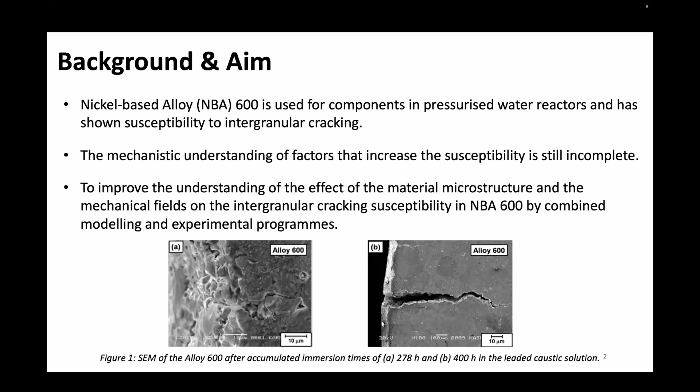So the aim of our project is to improve the understanding of the effect of the material microstructure and the mechanical field on the intergranular cracking susceptibility of nickel-based alloy 600 by combining modeling and experimental programming. So here, we want to represent the real behavior of alloy 600. Before walking into the simulation, we need some realistic finite element structures. One way of obtaining such detailed microstructure information is by using 3D EBSD.

With the realistic model, we then proceed to the simulation part, where we want to model the deformation. For that, we use the crystal plasticity finite element method to simulate the material deformation at a single crystal level. And then we expand this to look at the grain boundary excess energy, which is very important in the simulation of intergranular cracking. And for this, we use the cohesive modeling method.

We first start based on the surface energy of nickel alloys. Then we adjust the cohesive property, basically the grain boundary energy, based on the grain boundary misorientation. And our novel contribution to this field is that we account for the triple junction energy, which hasn't been thoroughly studied before, to further refine the grain boundary energy calculation. With this method, we're trying to address the challenge of varying grain boundary excess energy based on the misorientation and the triple line, to improve the accuracy of the simulation of intergranular cracking.

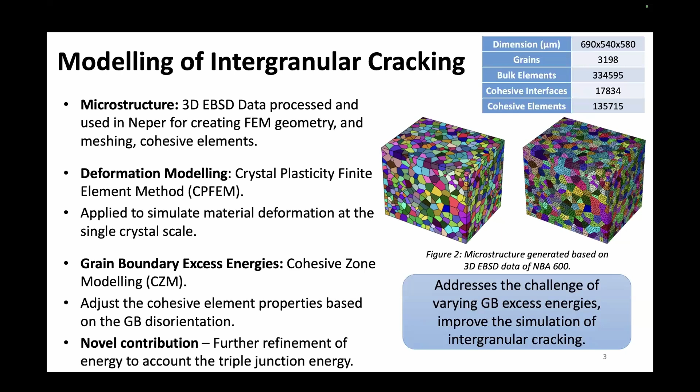And our second method is to assign different cohesive energy based on the misorientation of the grain boundary, based on the existing literature. With this method, we can account for the effect of misorientation of the grain boundaries.

And then our novel approach is integrating the effect of triple line junction into the GD model further to account for the effect of triple junction disclinations. With all the 3 models, we are trying, as mentioned, to account for the grain boundary excess energy more accurately to better simulate the intergranular cracking.

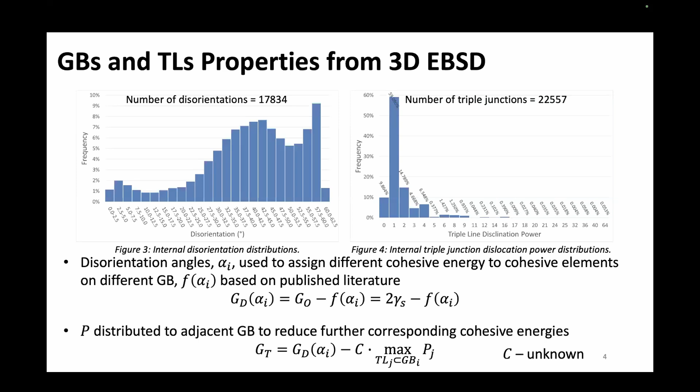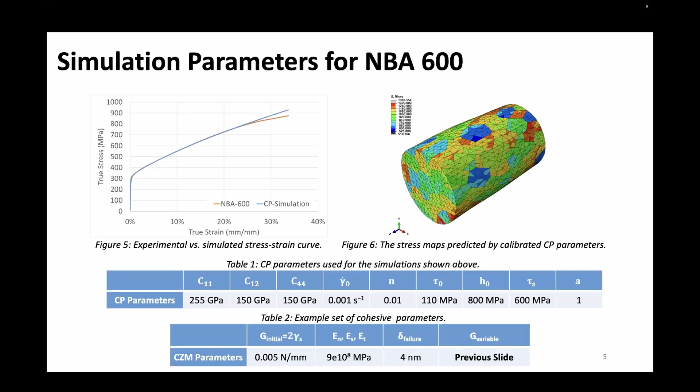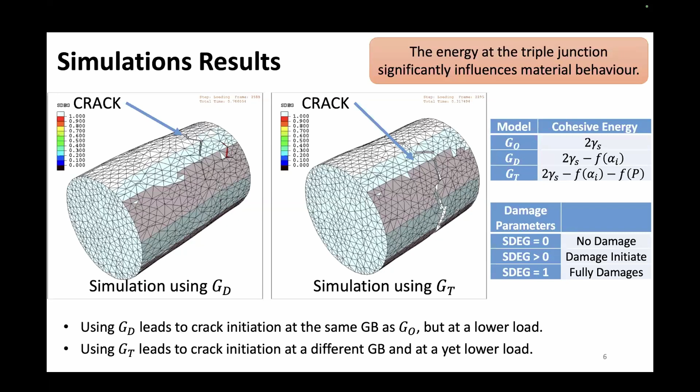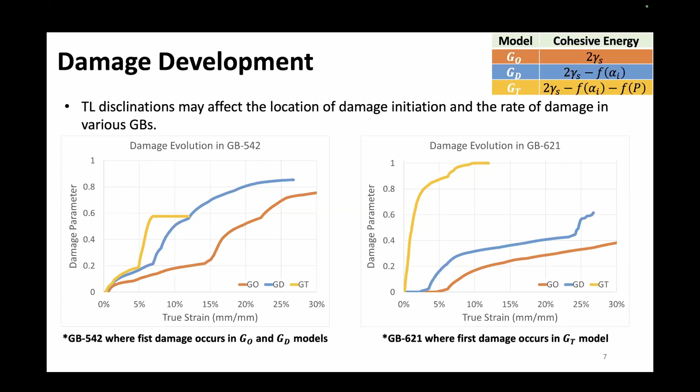And we can see that the GT has the quickest failure rate compared to the other two models, which reaches 80% of damaged elements at around 12% strain. The other two are slower, and the GO, which did not include any disorientation or triple junction, has been the slowest.

And when we turn our attention to this one, this is the percentage of the crack elements in the overall assembly. We can see the GT starts around 8% of the true strain and quickly fails at around 12% strain. For the GD model, which considers the disorientation, it didn't start until 24% of the strain, and it also failed quite quickly, but not as quickly as the GT. And the GO model, which is a baseline model, didn't fail until very high strain.

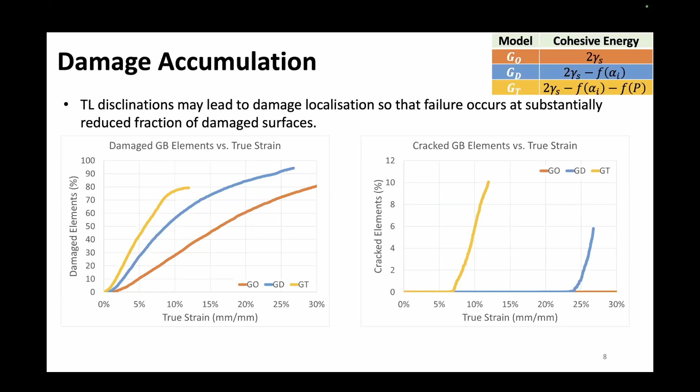So the takeaway from here is that the triple line disclination may lead to damage localization. So the failure occurs at a high rate and with a substantially reduced fraction of damaged surface. So that's our discovery from the simulations, and from those plots and the videos, we can see that whether we include disorientation or triple line junction disclination power has an effect on how we simulate the intergranular cracking.

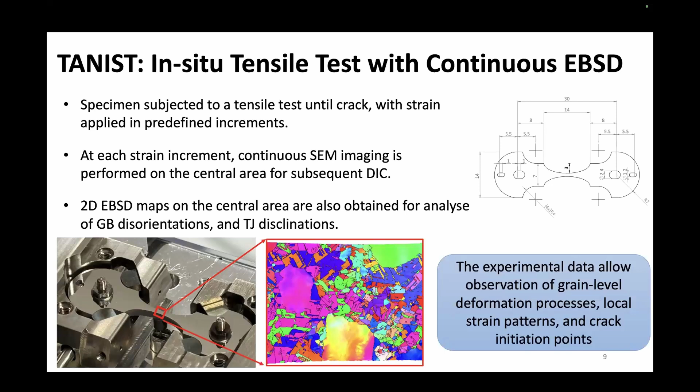And at each increment, we get continuous SEM images, which let us observe the material deformation and allow for subsequent digital image correlation. And EBSD is also taken at the central area. This here is an example, and this is the central area. This map can help us analyze the grain boundary disorientation, the changes in triple line disclination, and basically the variation in grains. Those experimental data will allow us to observe the grain level deformation process, especially in relation to local strain pattern, grain boundary disorientation, triple line disclination, and crack initiation points.

I don't know why it's not showing, but this is our preliminary analysis of the test, which should show the grain change and grain orientation change during the test. This map will help us analyze the change in disorientation and triple line disclination, which are critical for testing our hypothesis regarding their influence on material behavior, and we can identify the location where the crack initiates.

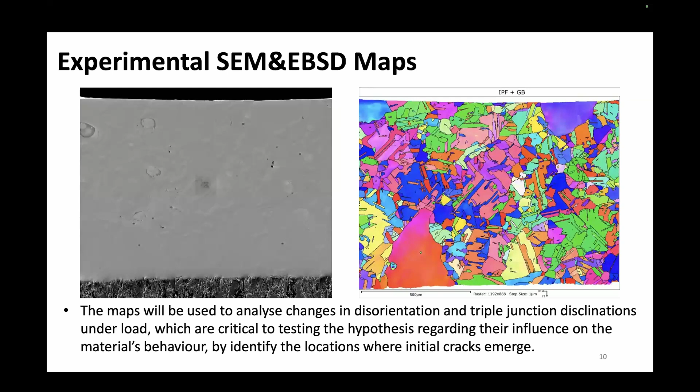So to conclude, our simulations so far have discovered that grain boundary excess energy, disorientation, and triple line disclination play a critical role in the crystal plasticity and cohesive model of intergranular cracking. Not only the load needed to initiate the damage, but also the damage initiation point and how the damage propagates. We are now conducting an ongoing experimental study to validate that hypothesis and check the effect of grain boundary energy and triple line disclination on material behavior.